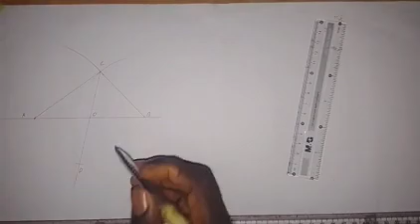Then we make an arc here. If I call this point D, it means that OD is equal to OC. That's what we have done here. The next thing that we are going to do is draw a line through this point, and that line will be parallel to this line AB, and we also do the same thing through point C.

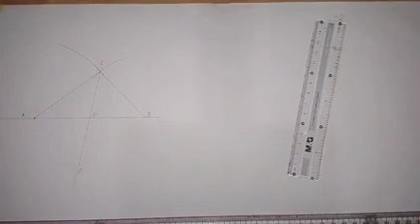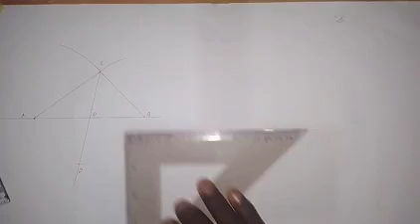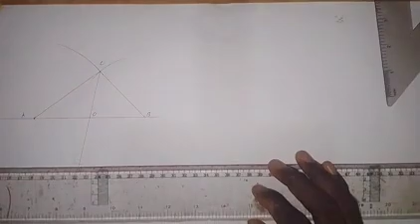Just look at the way I'm going to do it. With my set square like this, I will set my set square on line AB. Then, though it's going to be a horizontal line, which means I can even use my T-square to do it, because I used the T-square to draw this line. So instead of using a set square, I can just draw a horizontal line through this point like this.

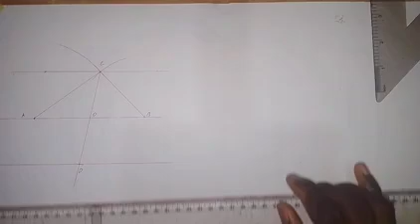Then coming up here, I will also draw a horizontal line through point C. So we have it like this. Alright, so the next thing we are going to do is the one that I will need the set square to draw, which is this line CD. I need to draw a line like this line CD through point A and through point B. So I need to make use of my set square.

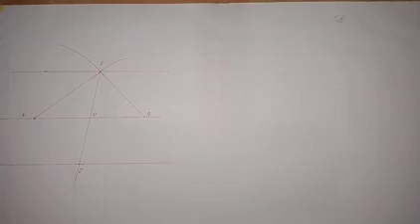So I set my set square on CD like this. Alright, so we have it. Then we shift the set square to point A, and we draw the line, from here going up like this. Then we also shift it to point B. Getting to this point B, we draw this line

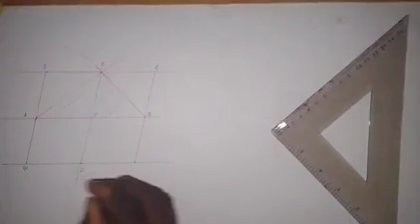like this. So if I call this point E, this is point E. This is F, this is G, and this is H. Okay, so these three lines are parallel to each other. You need to know that.

So now we need to construct the ellipse, and to do that, there's something we need to do. We are going to divide the distance OA into a number of equal parts and OB into a number of equal parts. Whatever number of equal parts we divide OA and OB into, we also need to divide AG and AF into the same number of equal parts, and we do the same thing for BH and BE.

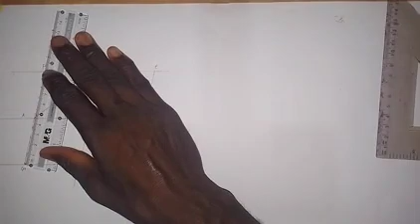We know that distance OA is 50 millimeters and OB is also 50 millimeters, so it is easy for me to divide it into 5 equal parts, that is 10 millimeters each. Then what is the distance AG? Let's measure distance AG. Looking at this, I have it to be 45. So I can divide 45 into 5 equal parts also, as we have here. I'm going to pause the video and do the division, then when I'm done, I'll come back and show you the next thing to do because of time.

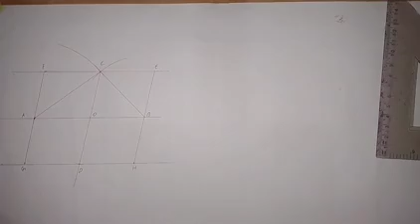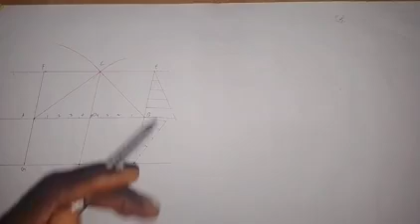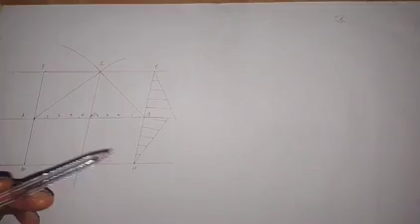Alright, so I have divided distance OA into 5 equal parts and OB into 5 equal parts, but I noticed that distance AG, AF, and also BE, BH is not equal to 45. That's why I used this method to divide into a number of equal parts. So what I'm going to do now is transfer these points to this side.

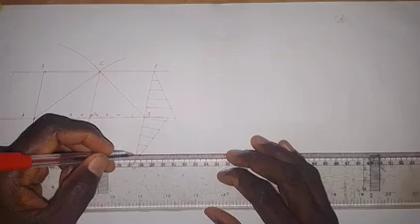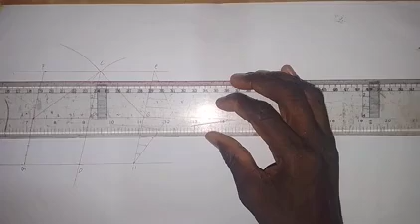For this one, I'll just mark it here. I'll set my T-square on this point, so I can mark it here like this. For this point, I will also mark it here. Then here, I will do the same thing. Then coming up here, I also have it marked here. Then I will do the same thing up here too, like this. Then this point, we have it here. Then the last one here, we also have it here.

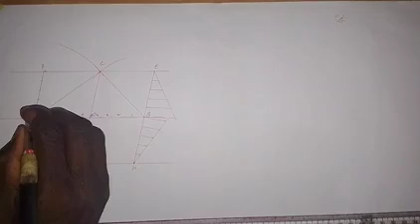Alright, so what we need to do now is to number these points. On this side, if I take this as 1, this point will be point 1, this is 2, this is 3, this is 4, and here is 5. Then for this one, this should be 1 prime, this is 2 prime, 3 prime, 4 prime, and this is 5 prime here. For this one, I've already numbered it: this is point 1, 2, 3, 4, and 5 in the middle here. Here I have 1 prime, 2 prime, 3 prime, 4 prime.

Okay, so I need to number this also. You could leave this one unnumbered, or if I'm to number it, I'm going to have this as 1, 2, 3, this is 4, and this is 5 here. Then here, this should be 1 prime, 2 prime, 3 prime, 4 prime, and this is 5 prime. So now, let's go and work out the construction of the ellipse.

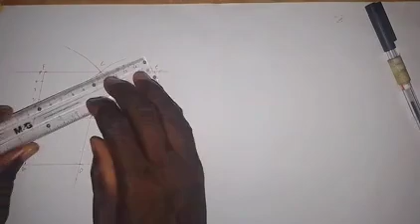So what I need to do now is draw a line from point C to meet each of these points on AE. So I will draw a line from C to join this together. Then I will also do the same thing on this side, on this point. Then I will join C3 together. Then I will join C4 together, like this.

Okay. So then I also need to join D1 prime together. Don't forget what the question says: we should draw an ellipse that will touch the 3 vertices of the triangle, that is ABC. So we also join D3 prime together like this. Then we join D4 prime together, so it goes like this.

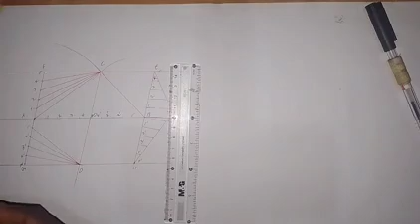Alright, so if I produce half here, then we can go on and produce this half. I will join together with the use of French curve. Then I pause the video and finish this one. When I'm done, you see what I've done on this side. Whatever we do here is what we are to do here, so let's take note of that.

Now, from point D here, I'm going to draw a line passing through point 1 on OA. So from D, I will draw a line that passes through point 1 on OA. It goes like this. So it meets line 1 at this point. We take note of this point.

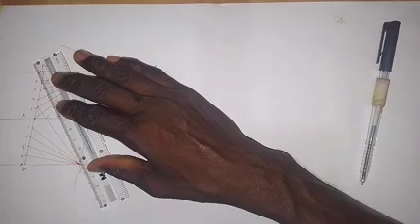Then I will also draw a line from D passing through point 2 and meeting line 2. So it meets 2 at this point. Then I will draw a line from D passing through point 3, and it meets line 3 at this point. Then I will draw from D again, passing through point 4 and meeting 4 at this point.

Then we draw from C again, passing through point 1 on OA, meeting 1 at this point. We are taking our time to do this so that you can understand it. Then we draw from C again, passing through point 2 like this, and meeting line 2 at this point. We take note of this point.

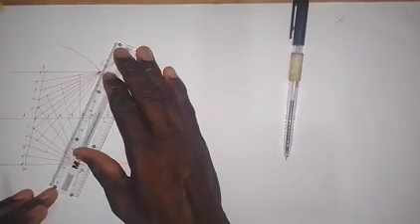Then we draw from C again, passing through point 3, meeting line 3 at this point. Then we draw from C again, passing through point 4 on OA. Okay, so this is it. So we have the point here.

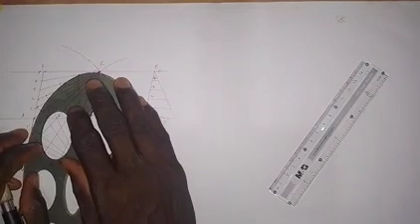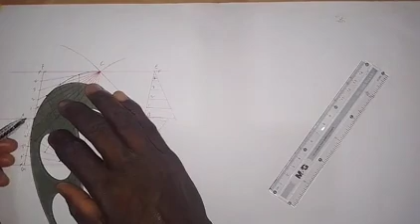Then we take our French curve to join this together. Let me do this half, then I will do this while I pause the video. Whatever I do here, as I said, is what I'm to repeat here. So let's join this together. We set the French curve, then I join this together. Alright, so we have joined that together.

Then I can also turn this. We have to take our time to do it; it's not something we can rush. I can join these 3 points together. Then these 2 points, I can join them together like this. Then I can join this point together with this. Alright, so we have formed that.

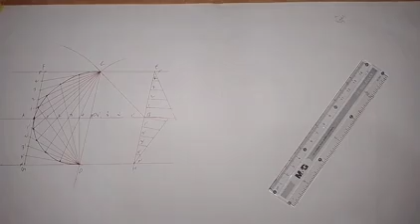It remains this side, so I'm going to pause the video and do that. Alright, we have obtained the points as you see here. Let's join them together with the French curve, starting from here. So we are able to join these 3 points together.

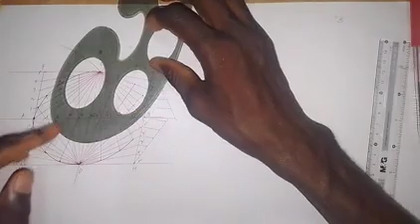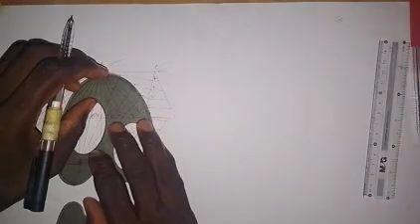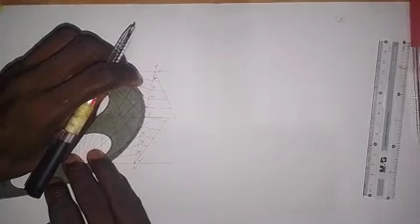Then we can join these 3 points together here with point B, like this. Alright, we have completed that. Then coming to this side, we need to set the French curve very well. Then we join this together like this, joining these 3 points together.

Alright, so this is how the ellipse will look. It's as simple as I've done it here. All you need to do is practice. When you practice it, you become a master at it.